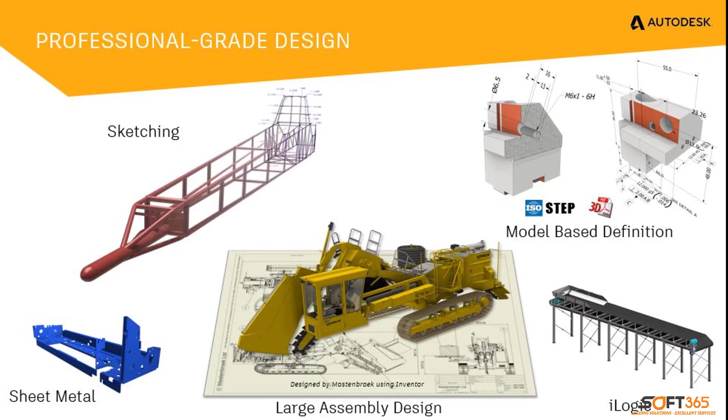Autodesk Inventor offers professional-grade enhancements in the 2018.2 release.

Earlier this year, model-based definition was rolled out with the first release of Inventor 2018. It came with the ability to export 3D annotations such as STEP AP242 formats and 3D PDF.

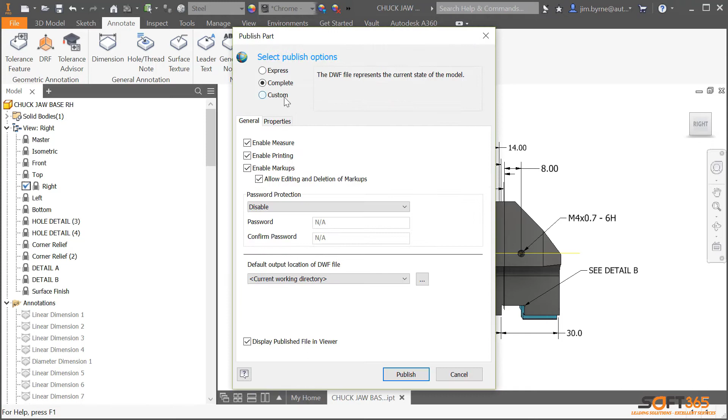In Inventor 2018.2, MBD information can now be written to the DWF format and is viewable in Autodesk Design Review.

The 3D PDF export has been enhanced, providing better visual tools. Now when selecting a dimension or callout, the reference geometry will highlight, making it easier to identify the dimension in any orientation.

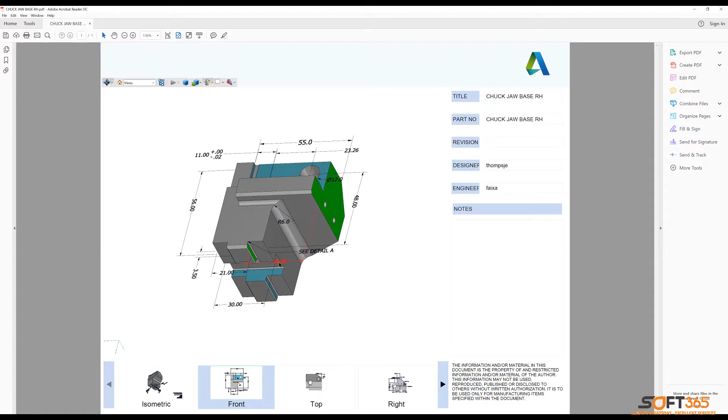Sheet metal in Inventor has the flexibility to use various bend rules for any bend in the model. But what happens if you change your mind and want all the bend rules to be the same? Rather than trying to find all the bends in the browser, simply sync one rule across the entire design, even multi-body components such as the model shown.

iLogic has several great enhancements for writing code. In the Options tab, there is now a pull-down to switch between classic and modern syntax coloring. Also included is a header section for header statements in your code. And you can use the mouse to hover over a function, statement, or variable to learn more about the syntax.

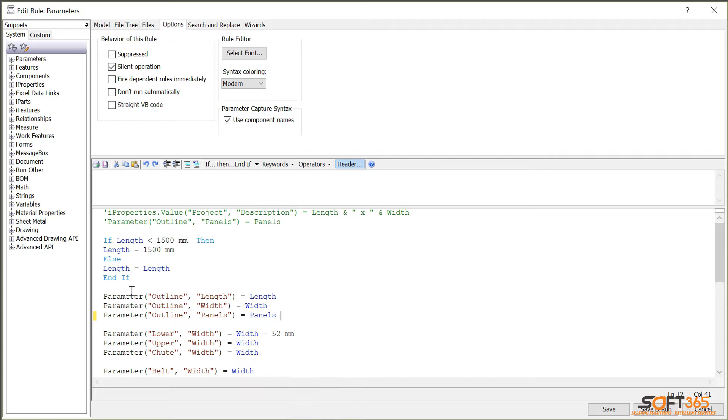Writing code is now faster than ever using iLogic. When inserting beginning parentheses or quotation marks, they are automatically appended. Autocomplete is enabled in the Rules Editor for Inventor parameters, iLogic objects and functions, Inventor API, and .NET objects.

This speeds up the process of entering code and minimizes spelling errors and other mistakes. It also increases accuracy and ensures statements will work the first time.

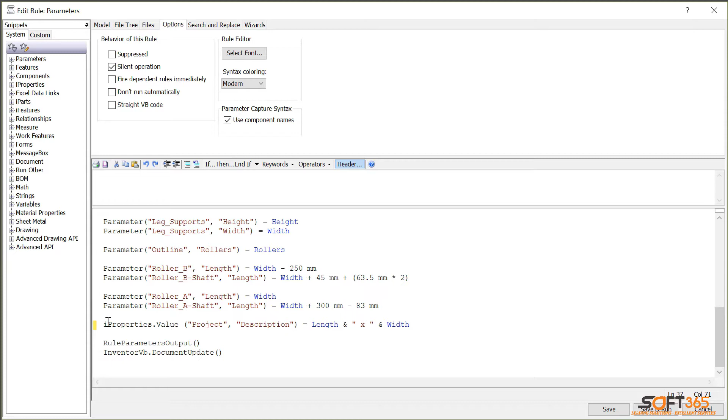Automation is becoming more popular as more companies look to streamline design work and cut out repetitive tasks. The Inventor team has invested significant time in this technology this year, and there is more to come. If you haven't investigated iLogic, this is a great time to see what it can do for your everyday work.

It's great for your company as a whole. Automate repetitive tasks, and even create customizable dialogues, making it easy even for non-CAD users to configure your products.

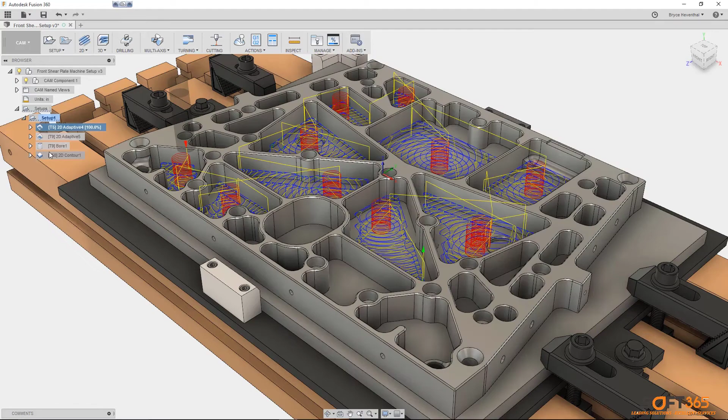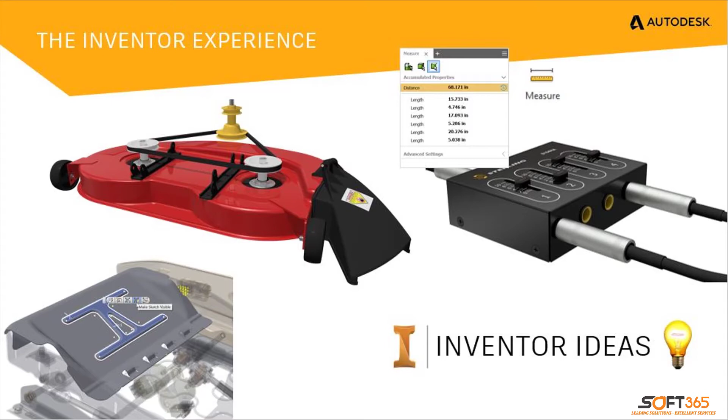Autodesk Inventor 2018.2 has addressed several customer-requested enhancements, and I'm excited to demonstrate them here in this video.

Starting with the Measure command, earlier this year we introduced the Measure tool with one button for all types, utilizing the panel for a great new interface and experience. In this release, we have additional capabilities for accumulated measure.

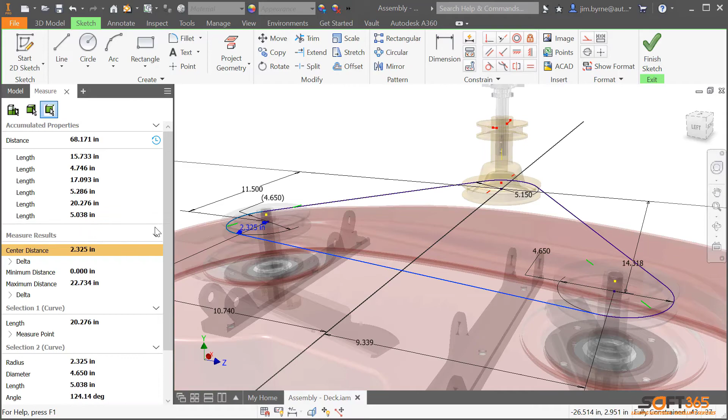Select values from within the panel to determine the total length or area for selected objects. Notice the history provides the option to delete selections if necessary, or hide the history to reduce scrolling in the browser. Once again, this isn't just for sketch geometry or edges.

It can also be used to measure the total area of selected faces. Every value in the panel has the option to add it to the history. As usual, the dual unit column is customizable and can be turned on and off as needed.

Have you ever had a sketch change shape when adding the first dimension? This can happen when the sketch is initially made too large or too small. Now check the box to scale the sketch on the initial dimension, ensuring the geometry maintains its original shape. No more dragging sketch entities around only to get back to where you started.

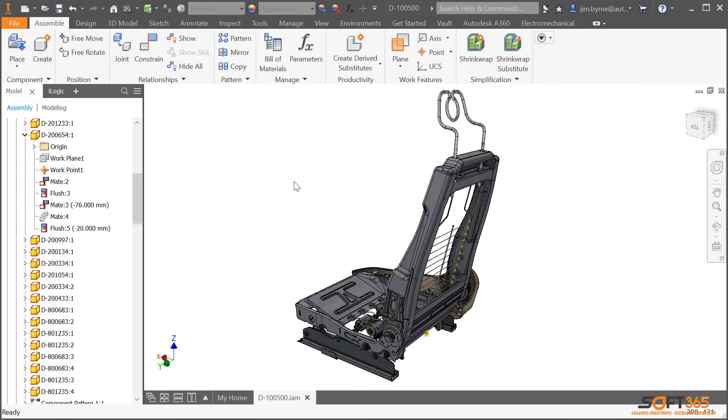Speaking of sketches, sometimes they are needed to refer to when creating other features in the design. Now you can show existing sketches by selecting the face of a feature. There is an option to toggle the visibility of a sketch on and off in the 2D Sketch Mini toolbar.

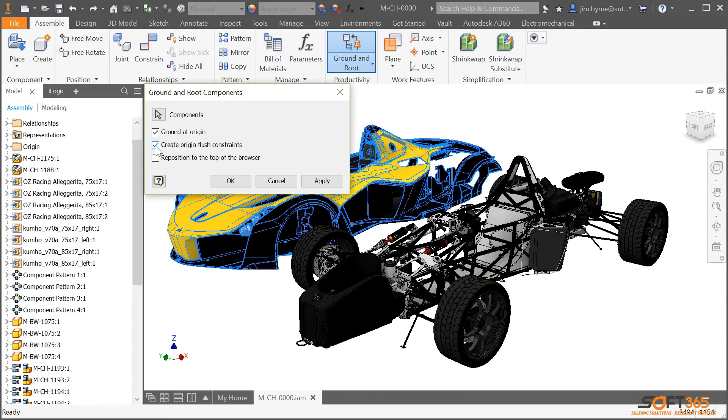Let's take a look at enhancements made to assemblies. Ground and Root now opens a dialog and presents separate options to users who don't want to do all three. In this case, we chose the body of the BAC Mono, grounded it at the origin, repositioned it to the top of the browser, and created flush constraints.

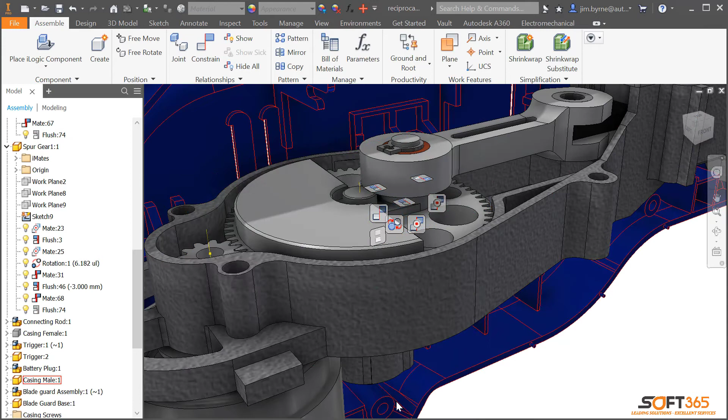Autodesk Inventor does a great job enabling users to create, view, and edit constraints in assemblies. And we realize there are times when even suppressed constraints need to be edited. Not a problem in Inventor 2018.2.

Change any suppressed constraint to apply a distance or even change the type of constraint from flush to an angle.

Chamfers have been available as assembly features in previous releases. The preview has been improved, making it easier to visualize before applying it to the model.

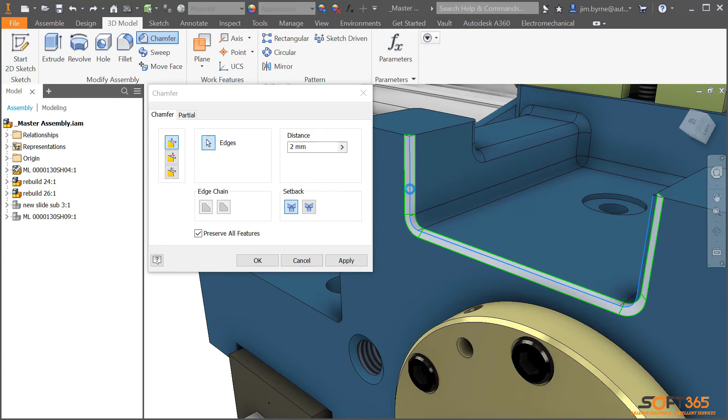For many designers, the Content Center provides a significant portion of the components needed for their design, and the search tool is paramount to efficiently finding the correct part number. The interface will assist in the hunt, but what if you already know a portion of the part number?

Use the drop-down to look for members. Type in what you know and find the member immediately. Get the parts you need faster than ever.

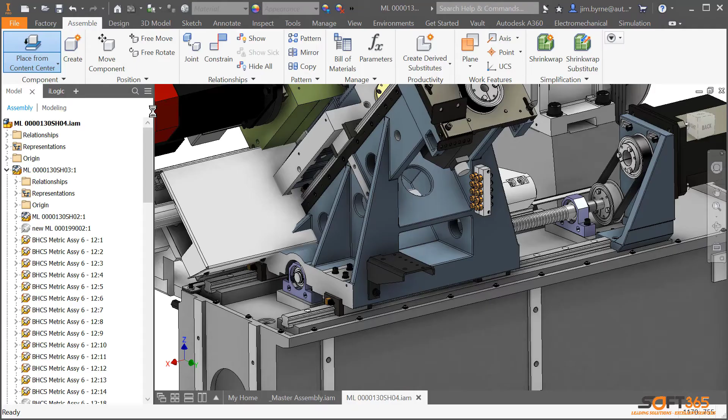Moving on to drawings, hatch patterns are sometimes needed even outside of section views. There has always been the ability to create them. Now Inventor 2018.2 enables multi-selection to add and edit hatch patterns on closed-loop sketches.

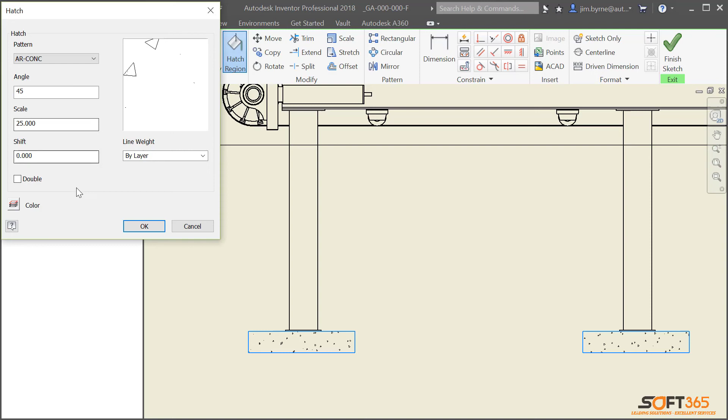Finally, exporting your designs as an image is a great feature for placing a view in a PowerPoint or Word document. Many times, the second step is to edit the image and replace the background with transparency. And that only works if the background is a single color.